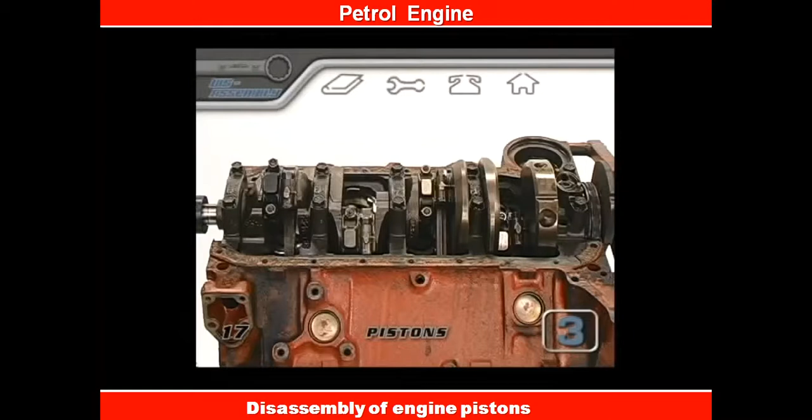The number 1 piston has the number 1 connecting rod. Start by unscrewing the nuts for the rod cap. When they're off, you'll need to remove the rod cap.

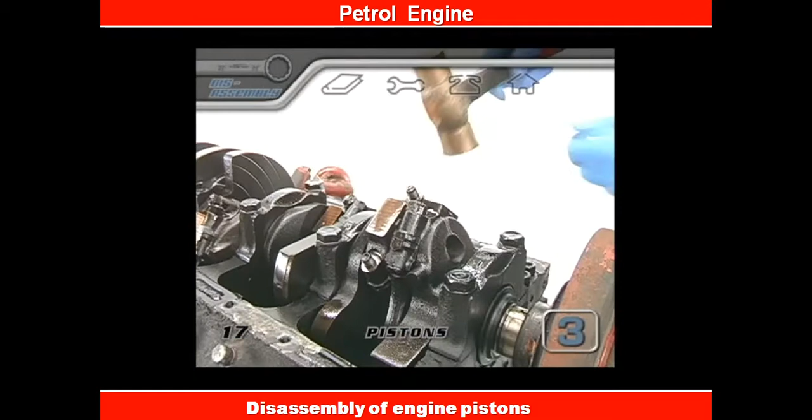To do this, you will whack on the end of the rod bolts that are pressed into the rod body. You can use a punch, or you can hit the bolts directly if you have a brass hammer. When the cap separates, you can pull it off by working it back and forth and pulling on it.

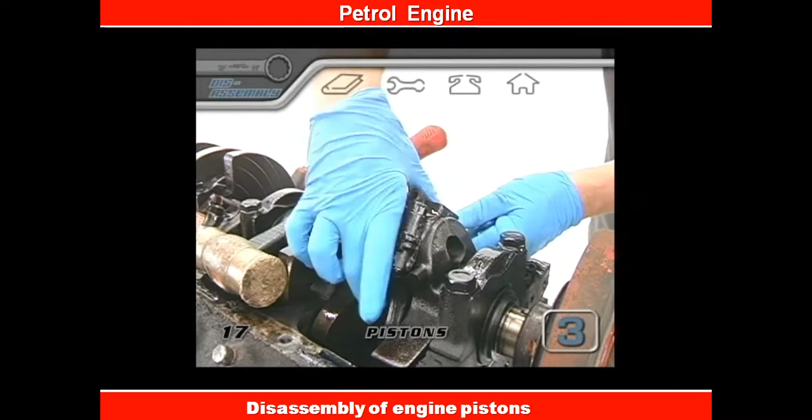If you look inside the cap, there should be half of a bearing shell there. If the bearing shell isn't in the cap, it would still be stuck to the rod journal of the crank, and you need to pull it off, or it might have fallen.

Next, you should slip some protector sleeves onto the rod bolts to keep them from scratching the crankshaft and the cylinder walls as the piston and rod come out. Slip one of the protectors onto each of the rod bolts and make sure they seat all the way.

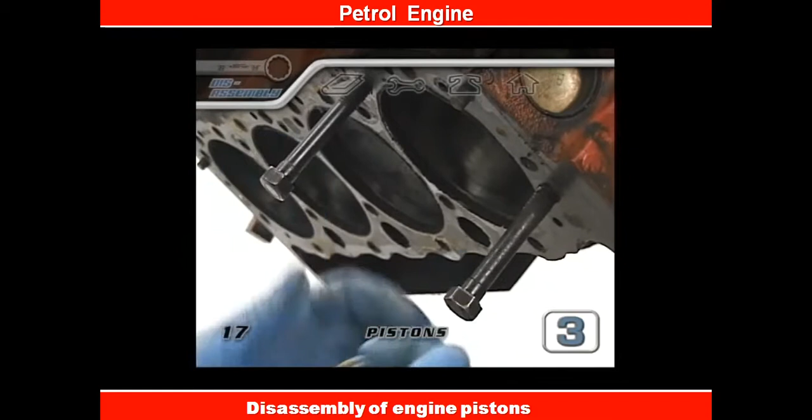Another little trick is to take 2 of your longest head bolts and thread them in a little bit by hand, and then stretch a few rubber bands across them about an inch or 2 away from the block deck. You could also use some thin wire or string instead if you want.

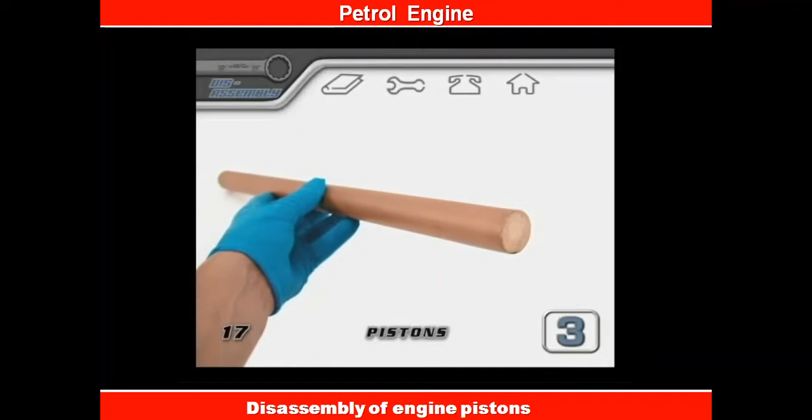Next up, you'll need a wooden dowel about as thick as a broomstick and maybe 2 feet long. You'll want to move the rod journal of the crank to the center line of the cylinder bore and place your dowel on the piston right about here.

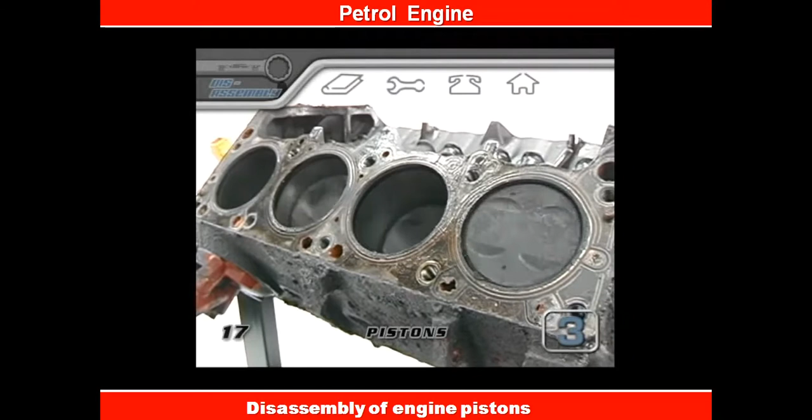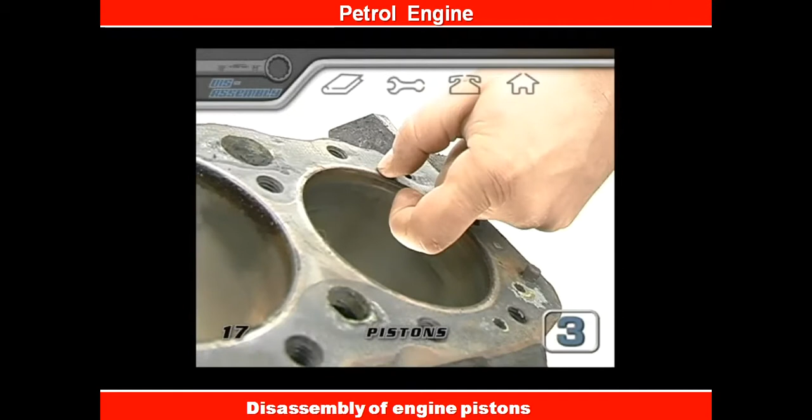Before you start beating on the piston though, consider this. While the motor is running, the piston rings slowly wear away part of the cylinder wall and create what is called a ridge. Higher mileage and harder worked engines develop more severe ridges than other motors. Carbon buildup also adds thickness to the ridge of a cylinder, but can be removed with a razor blade.

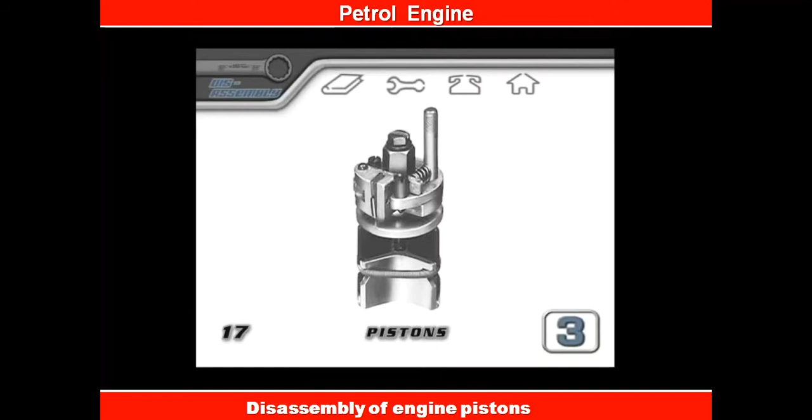A thick ridge can make it more difficult to bang the piston out. Many people believe that a ridge reamer can be used to cut the ridge and ease the piston removal. We don't recommend using this type of tool. They're difficult to use and don't provide a precise cut. Even if they work, you still have to have a machine shop bore out the cylinder.

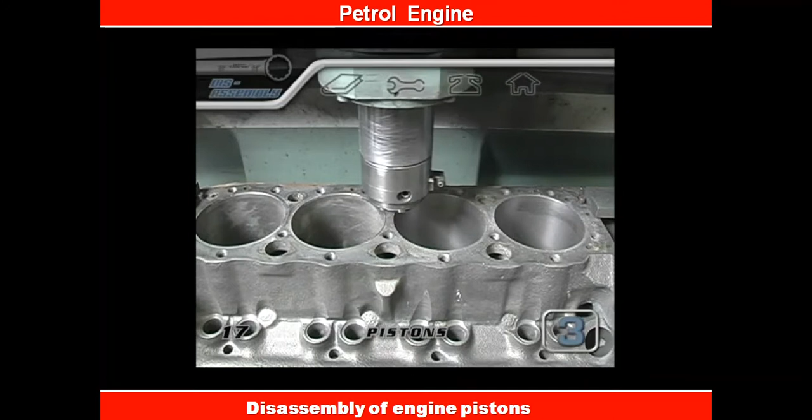This leaves only one reliable way to get your pistons out of ridged bores. A bunch of nice solid hits to the dowel in the right spot should have your pistons out in no time. In extreme cases, like with our marine engine, the pistons might be frozen in their bores by a bunch of corrosion.

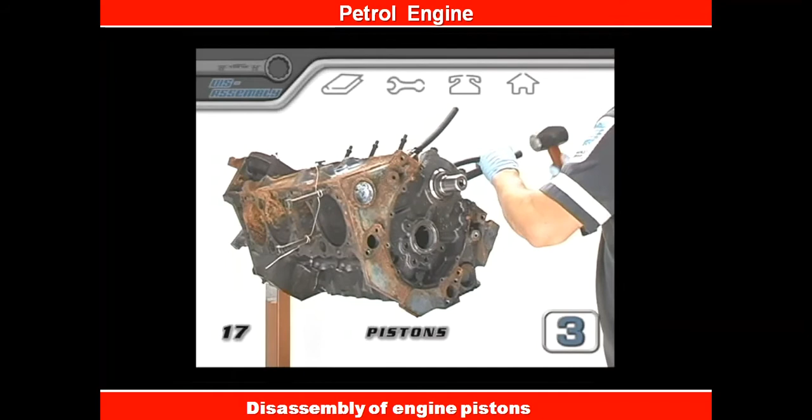A wooden dowel might not be strong enough for the job here. You might have to switch to a metal rod of some sort and then put some strength into the hammer blows. Occasionally, a piston ring or maybe a piston skirt might break when you're banging out old pistons.

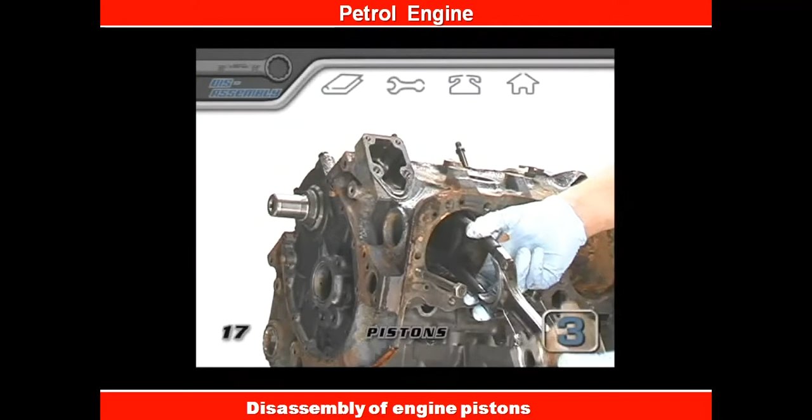This is actually acceptable because you need to consider that to fix the ridge problem, your cylinders are going to have to get bored out, and that would mean that new pistons are going to be needed for the larger bores. Back to a regular scenario, when your pistons do come out, the rubber bands or wires should stop it

from dropping and causing any damage to the piston or your bores. Then you can slide the piston out. Be careful not to scratch the cylinder walls with the edges of the connecting rod itself.

Moving on to the other pistons, sometimes it helps to start by lightly tapping on the cap on the side to loosen it up a bit. This rod bolt had to be hit pretty hard to get it to separate.

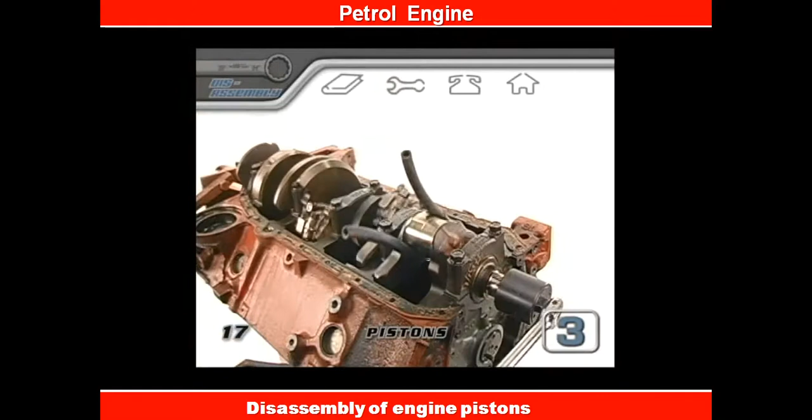When your protector boots are back on the rod bolts, you'll want to line up the rod journal with the bore center line again and bang away until it pops out.

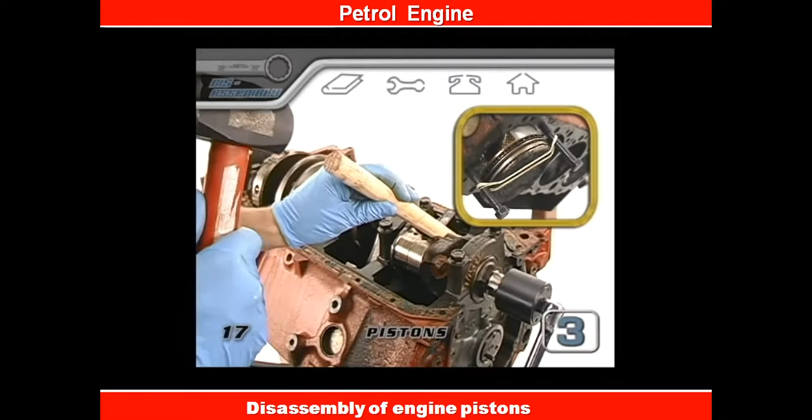If you have to hit the piston really hard to break the rings so that it'll pop out past the ridge, the rubber bands might break, or a piece of string or something, so you might want to have a friend there ready to catch it so you don't cause any more damage than necessary.

Here's a close-up of one of the rod journals and the damage that was caused by running an engine with a spun rod bearing. This crank had been machined undersized in a previous rebuild, and the damage was so severe to this rod journal that this crank couldn't be saved by having it cut.

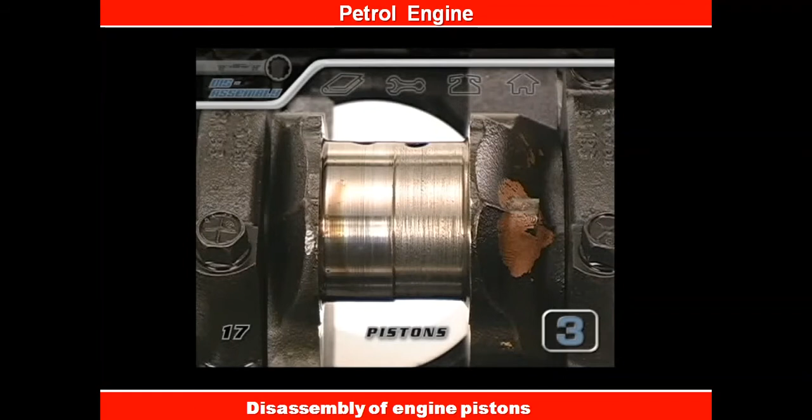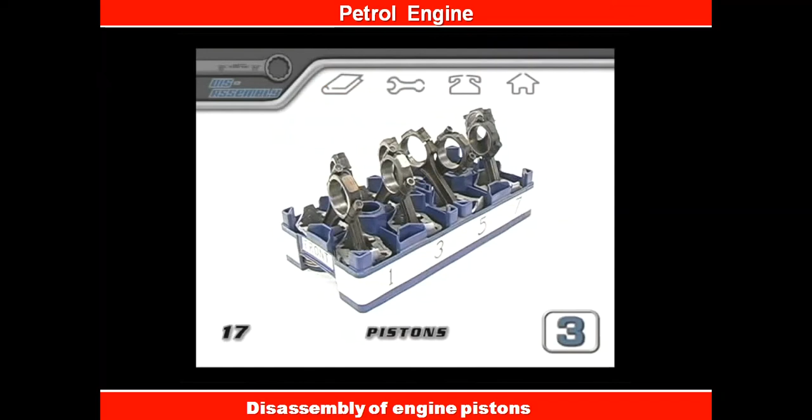As the pistons come out, it's nice to keep them in their proper arrangement according to how they were installed in the engine. A 2-liter bottle rack that you could get from a local convenience store makes a perfect container for 4, 6, and 8-cylinder engines. Put some labels on the side of the container that match the cylinder numbering of your engine.